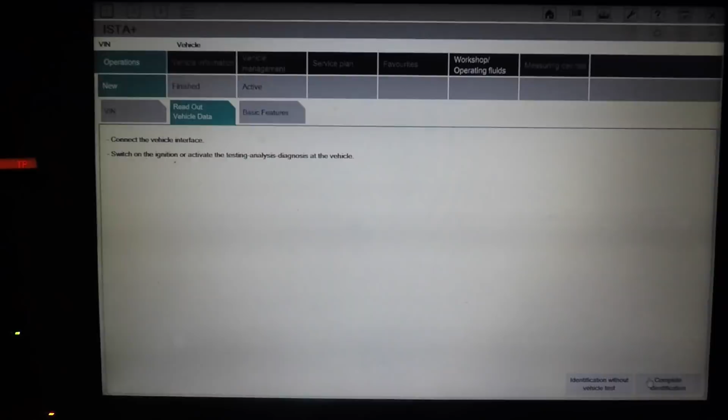So now it's loaded properly, which it will do. Anyone who's got this program, be aware of that - don't worry about it, it's not the program not working, it just can act up sometimes. As you can see, I'm not screen recording, and do I care? Not so much. Providing you guys can see it, that's the main thing.

I am trying to shoot as close as possible. Now the battery is 11.2 volts, as you can see. A lot of people always ask me why can't I see the voltage - well, you won't see the voltage if you're using a DCAN cable. You only see the voltage if you're using an icom.

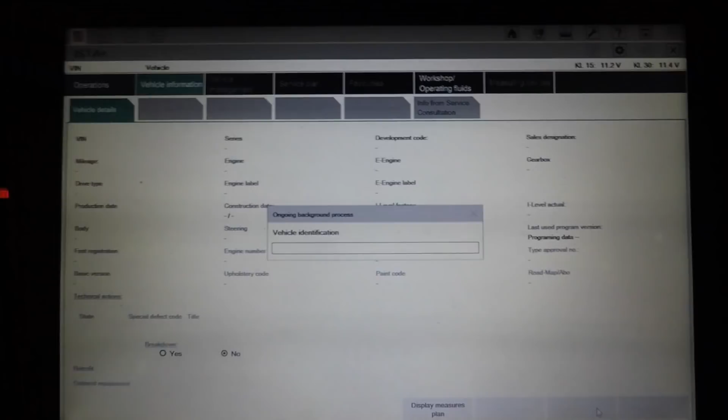Now as you can see, it's just scanning the car. On these cars, they take a long time - they don't communicate as quick as these 6 series do. These cars take a hell of a long time just to communicate with the vehicle. Don't ask me why, I haven't scanned this car since I've had it - I've been doing all the repairs.

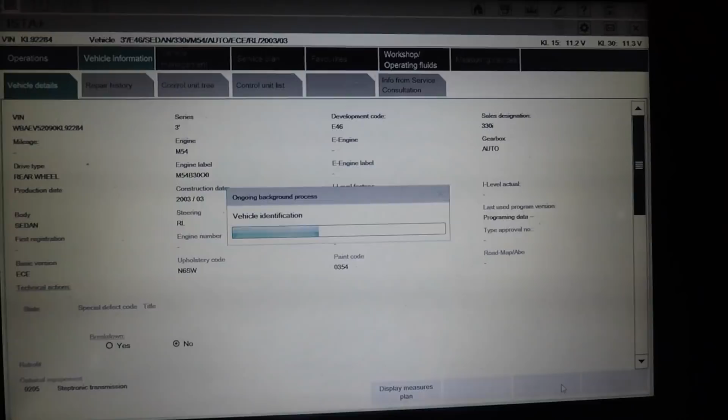We're going to now see what's going to come up. As you see, it's scanning the whole car. We're going to then now see all the fault codes. I'm going to show you all the functions on the car.

Do I worry if the battery goes flat? Not really - I've got enough jump packs, chargers, voltage stabilizers, the lot. So I ain't got one plugged up at the moment because I don't feel like I need to. If anything happens, we'll just plug one on - not the end of the world. I'm not going to plug a voltage stabilizer on now, as I've got no need.

As you can see, the DME's got a fault code. I dread to think what that is - maybe it's something because of how many things are disconnected, or maybe it's just because the car's been sitting so long.

As you guys probably will like to know as well, I haven't got the registration for this car yet - I'm still waiting for it to come. That's why I got the car cheap in the first place, because obviously it was part of a thing.

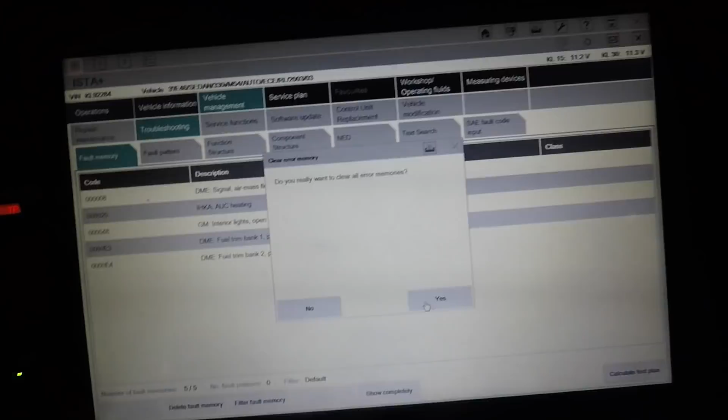And then there's the signal for the air mass flow sensor. Now I know why that was on, and that was because I didn't plug the mass airflow sensor back in when I did the PCV, so I know why that code's there anyway - that's not an issue.

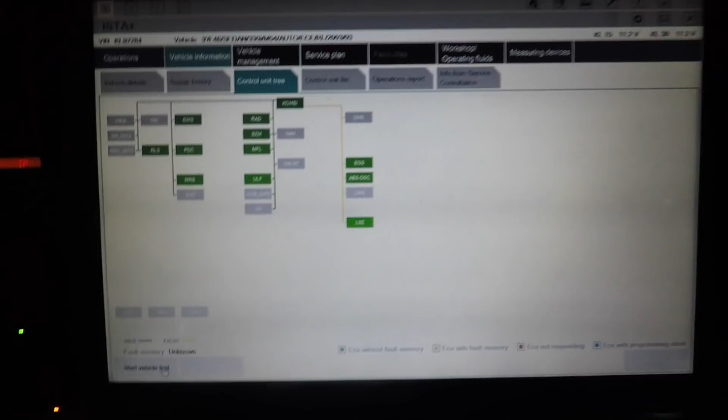Now what we're going to do is I'm going to rescan again. Now this is what you want to do - if you get any faults, the first thing you always want to do with a car is, some of the faults might have been rectified, is delete them and then rescan.

These cars are pretty easy. As you see, there's not many modules. You've got the EWS electronic drive-away protection - it's the same thing on the E60s, but a lot more complicated than what it is on the cars here on this year, because it's easier to actually make keys than it is on the E60. As you'll see here, all the modules turn up green.

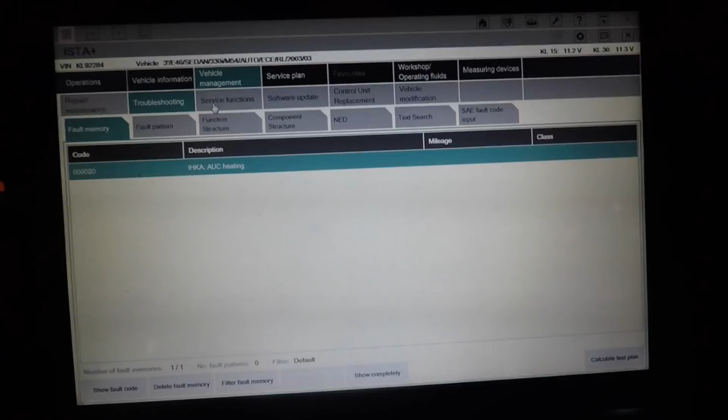Now what we're going to go into is vehicle management, and when you go into service functions, you're going to see there's not many choices - you've got powertrain, and then you've got digital motor electronics. Now when you click digital motor electronics, you've got adjustment of idle speed.

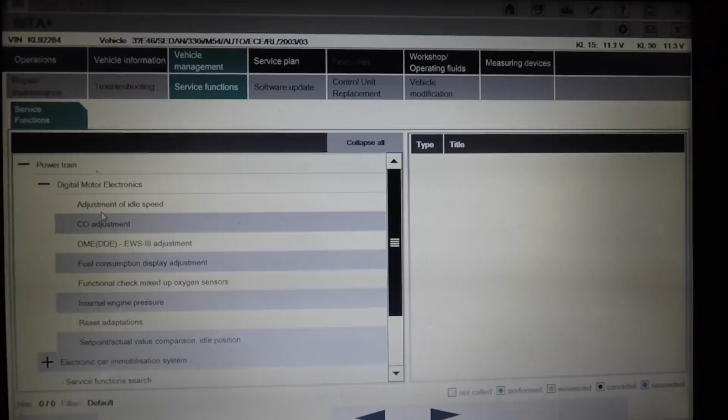Now as you guys know, on the M52 there was a rough idle problem, and you could do that to get away with getting rid of your rough idle. You don't have to do that on these - these M54s run sweet as. I don't see why anyone would want to change the idle on these - these idles are the best engines you could ever get.

CO adjustments, that's for your CO2 - if you check what kind of CO2 you're giving out, that obviously determines your road tax, especially in this country. The more CO2 you pump out, the more road tax you pay.

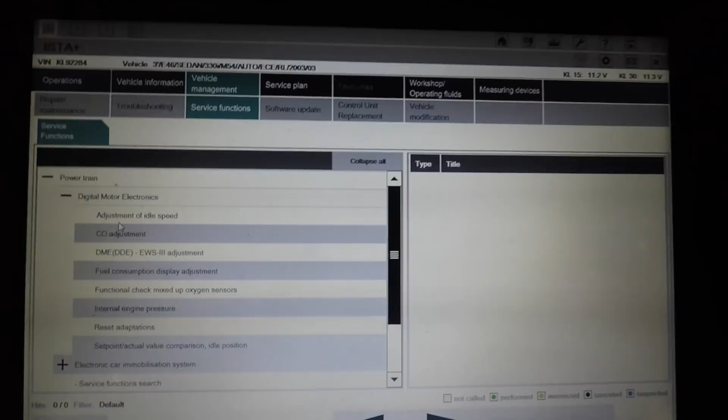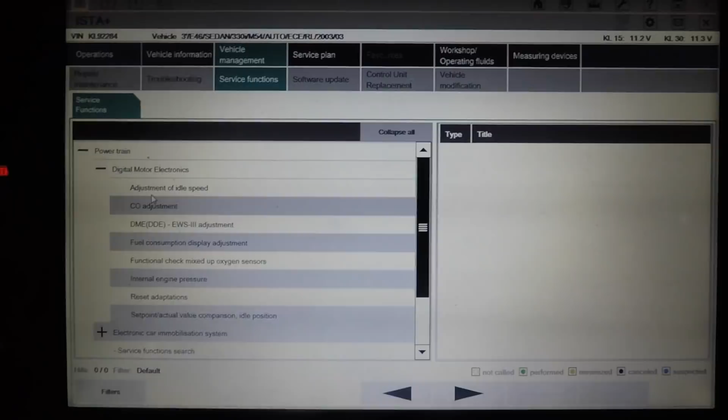It's not like it's built into the CAS, which is a complete... well, you know what I'm going to say about that. Fuel consumption display adjustment - that's if you're using a different fuel grade, which we're not. I'm using the right fuel, so this is all correct. There's no need for me to do that.

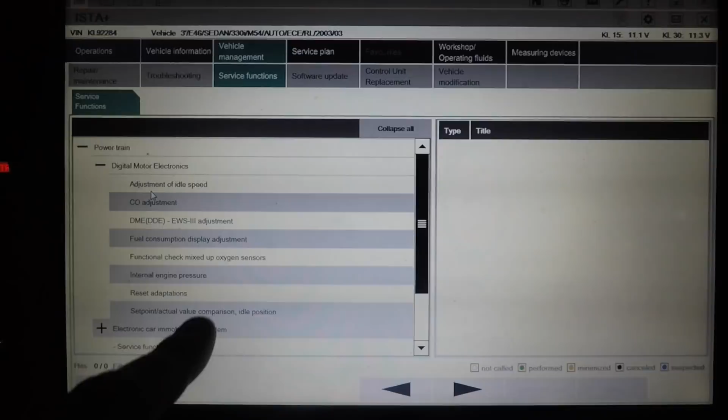Functional check, mixed up oxygen sensors. Now as you guys know, if you take off the rocker cover, you've got to take off the oxygen sensors. If you ever unplug them because you're stripping the engine, or taking a manifold off for instance, you can come here and this will tell you if you've mixed the oxygen sensors up. It will test them and tell you, and then you'll know to reset them.

Internal engine pressure - again, you need a different kind of system for that. You need a piece that connects to the laptop that runs the testing of engine internal pressure, but you can test if it's got low pressure on the cylinders and so on.

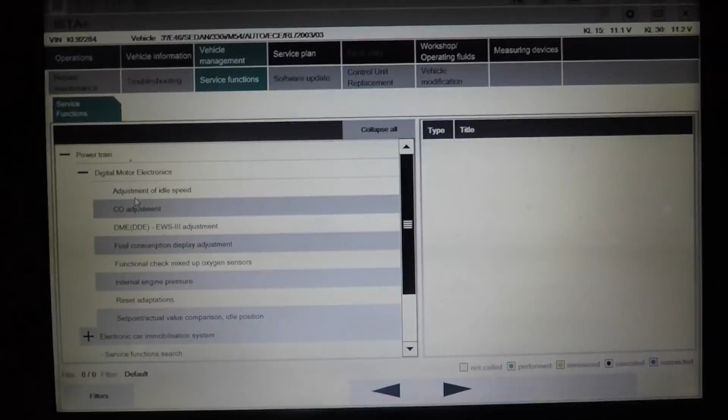Reset adaptions, as you guys know, resets the learning adaptions for the gearbox and the engine on these cars. Very good function, I use that a lot - that one especially when I get a new car. That's the first thing I did when I purchased this car from the owner.

Straight away he was asking me what I was doing. I told him I was resetting the adaptions, because that brings up any known fault code someone's tried to hide. So when you reset the adaptions, set point value comparison idle position.

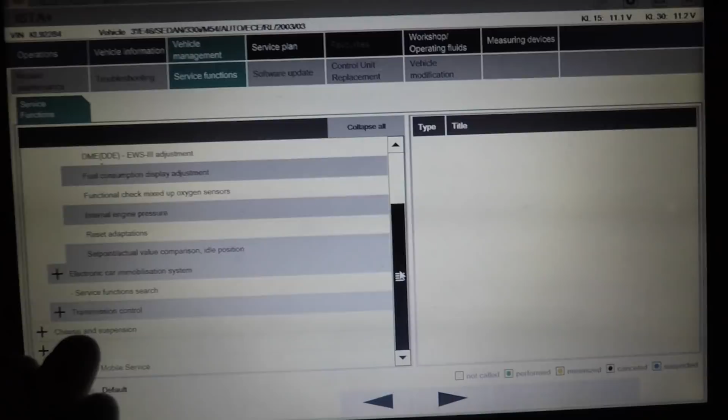That will tell you the actual position of the idle and the set point. So if the set point is set at 650 RPM and the actual value comparison ends up sitting too high, one of them's out of sync, so you can find out if it's the computer that's running the idle at a point - so you know it's the sensor - or if it's the idle control valve itself not functioning fully.

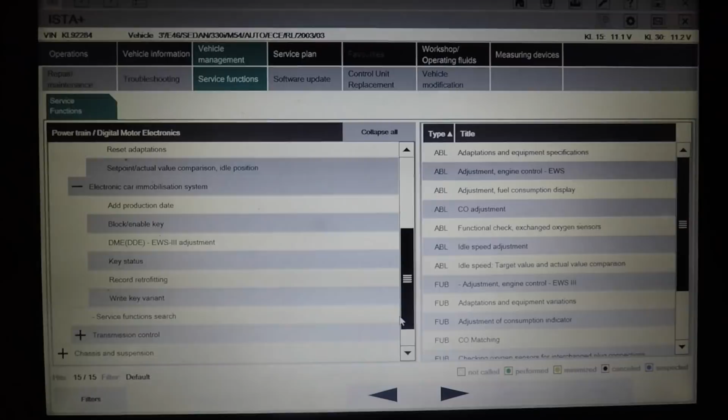The electronic car immobilization system. Now in here you've got add a production date, so you can add the production date of the key. You can block and enable a key.

Same thing on the E60s - if you lose one of your keys and you've got keys registered in the EWS, you can block them if you lost them. I have both, I don't need to do that.

Again, you need to do the DME EWS adjustment for that key, so the key registers with the car to unlock it and it deactivates the immobilizer.

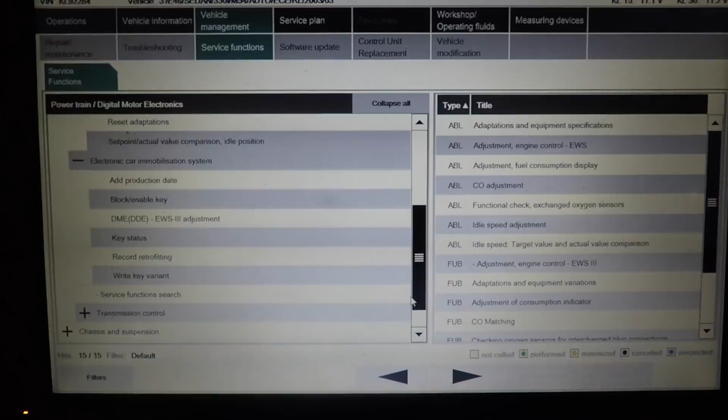The key status, so that will show you the battery and if the key's picking up a signal between the central locking, which mine are.

Record retrofitting - so retrofitting will be if you've retrofitted the EWS or retrofitted a new key, and you can write the key variant as well. It's all to do with really the keys on these cars, because they're not hard to do.

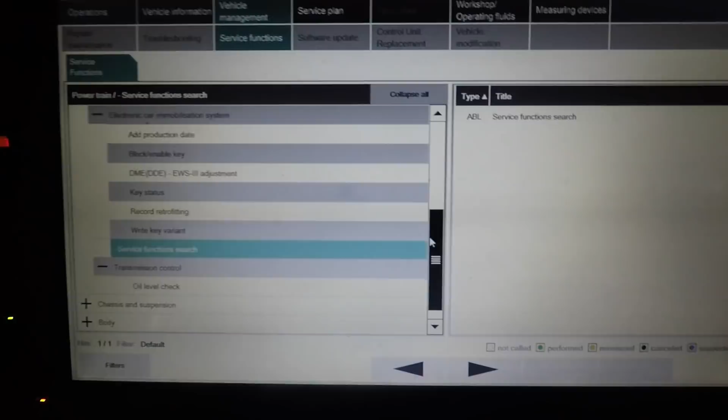And then you've got the service function search, which is all the service that's ever been done. Oil level check - again, that's only the one in transmission, because it doesn't come into adaptions here on the transmission on the E46. But the oil level check is the oil in the transmission, so you've got to let the car get up to temperature and you can check the oil.

That should be used when you change your gearbox fluid on any of these cars. Use that and it will tell you the correct temperature of the oil. A lot of people don't do that, but if you use it, your gearbox will be fine when changing the oil. Chassis and suspension.

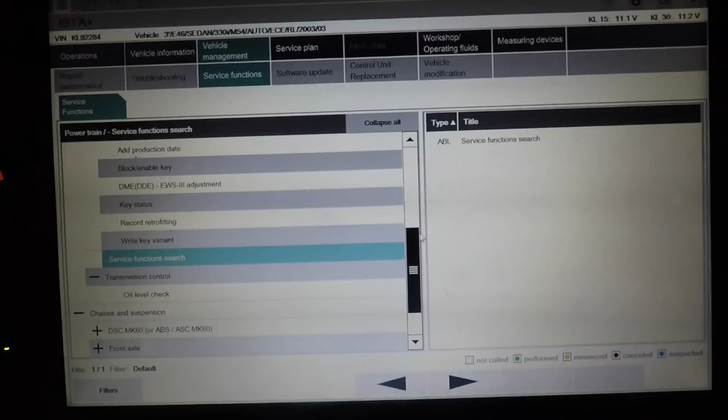Now as you guys can see here, we've got the DSC MK60 ABS module. You guys know what that is already - that's a common problem on the E39s, they go out. Now what you can do with this is check the ABS module.

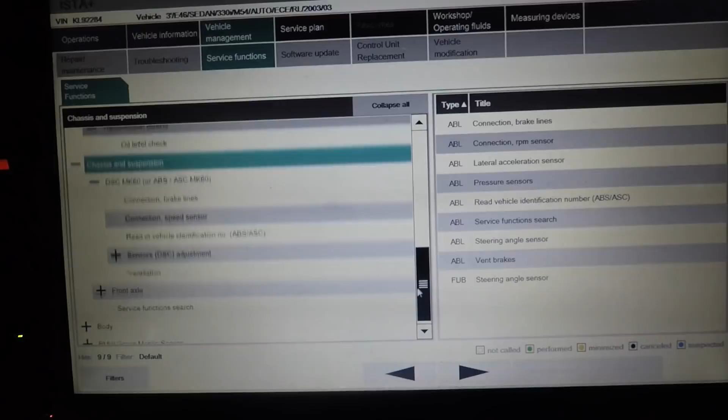So if I click that down, you can check the connections to the brake lines, the speed sensors, and you can also check the read-in vehicle identification number. As you guys know, when you change these modules, you have to change the identification number on them modules as well, because if you don't, they won't pair up.

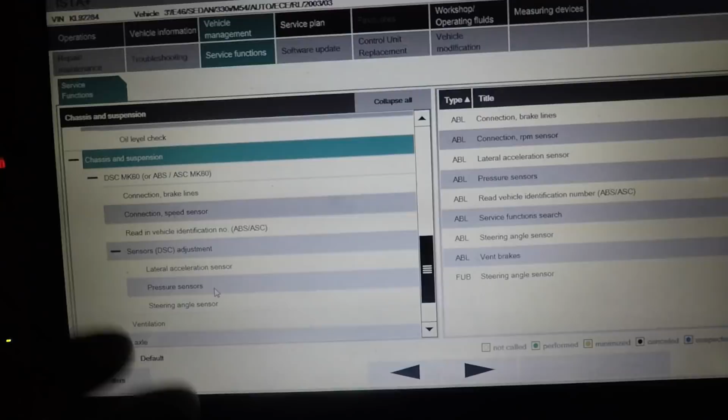Sensors, DSC adjustment - so the lateral acceleration sensor, which is your throttle valve, as you know that's got to be adjusted, as it knows it's got a sensor on the pedal itself. So you really do need to recalibrate that all the time when you fit a new throttle position sensor. Pressure sensors for the DSC - these have just been replaced, two of them, so they have been done.

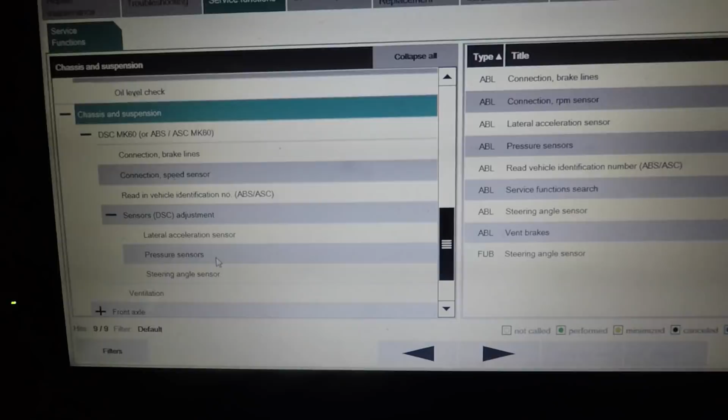Steering angle sensor, you guys know what that is very well. Nathan's done a video about that. It's not really common on these. In the US, I see it a lot, but in this country, I've not seen it on any cars I've had, so I'm not going to go into that.

Ventilation is for the ventilation of the brake, so that's to bleed the brake system on these. You will see bleeding brake routine on the E60. On the E46, it's called ventilation to vent the brakes. It's a whole different setup. This is what I was telling you.

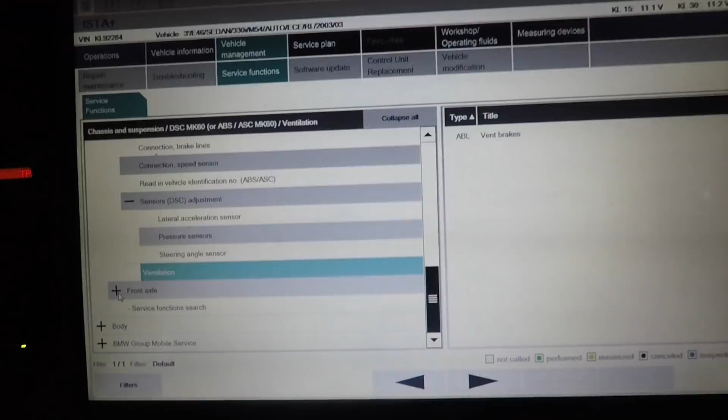Now you can check the wheel control joints on the front axle, and that just tells you how to do that. The service functions, again, is the search, you don't need that. Now in the body, as you'll see here, there's not many modules here as there is in the thing, air conditioning.

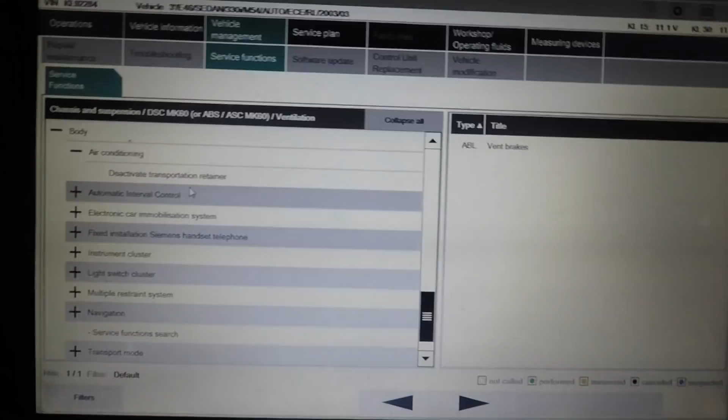You can deactivate the transport retainer. As you guys know, when these cars come brand new, they set a transport mode on them. Why do they do that? They set transport mode so the AC compressor doesn't wear out in transport and getting bounced around all over the place while it's on a low loader coming over to the country. So you can deactivate that. Most dealers do that straight away as soon as they get it anyway, take it all off transport. So if it's got air suspension, you've got transport mode on.

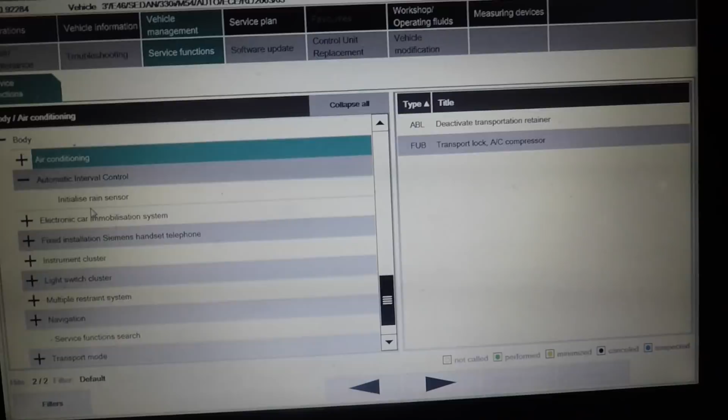Automatic interval control, initialize the rain sensor - you guys know what the rain sensor is, it's above your mirror in that little black casing. Sometimes it goes bad, sometimes it doesn't turn on when you want the auto wipers to. On the E46, E39 and E53, they turn on automatically. On the E60s, you have to turn that on. Again, that all varies. If you've got a problem, you just come into there and reinitialize it.

Electronic car immobilization system. As you guys know, we've already been through that. We've just went through that. It's all the same thing, it's no different.

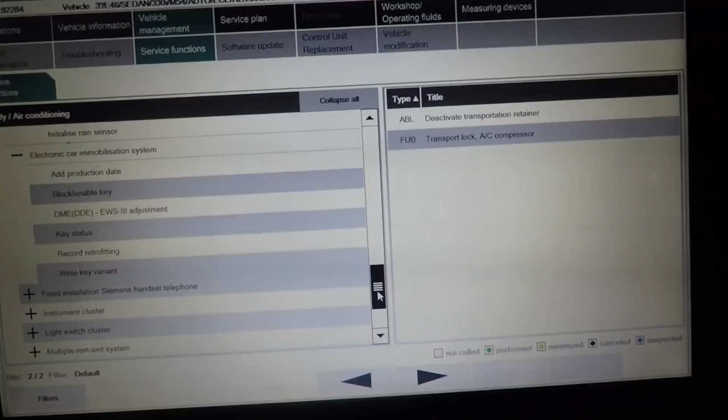Instrument cluster, so you can reset the service interval indicator with a diagnostics tester or without a diagnostics tester. It just depends. Or you can do a system test on the cluster itself, so if the cluster's at fault.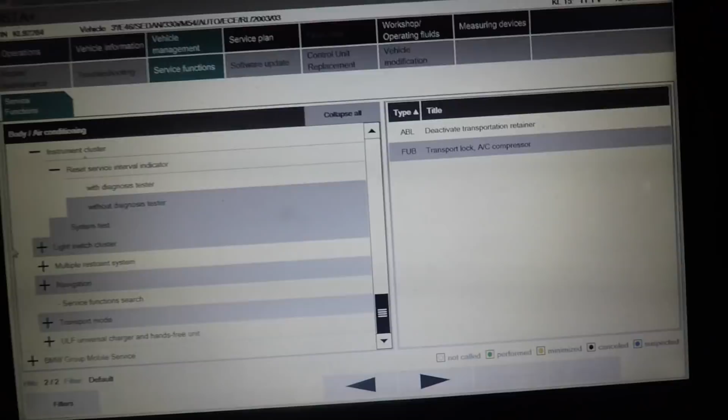Next one is light switch cluster. You can read out the operating data from the light switch data, so if anyone's tried to do mileage manipulation, for instance, you can test it.

Multiple restraint system, you can read the coding data to make sure the coding's correct for the airbags to deploy. It's all things like that, especially because if you change an airbag module, you need to make sure it's coded in.

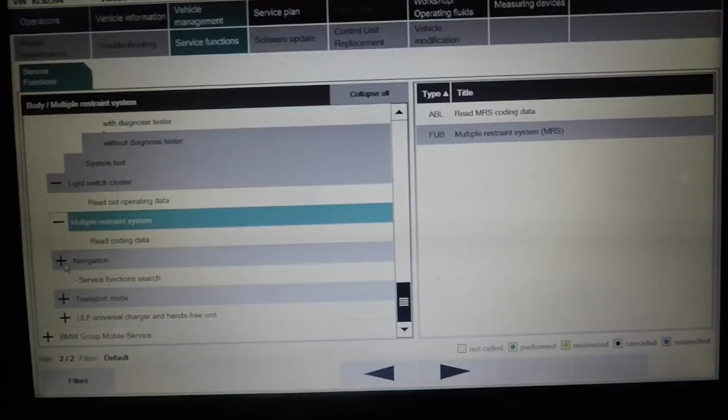Navigation, DVD lock - we don't have navigation in this car. So, transport mode as well, as you can see there's the delete transport mode. It deletes everything in transport mode.

ULF, universal charger and hands-free unit - that's just change emergency call number, nothing major. BMW Group mobile service, this is all if you've got cover on your car from new.

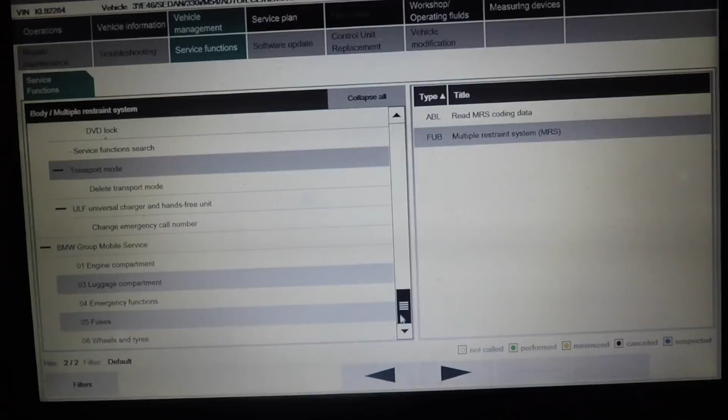As you can see, there is a lot there, and as I say, troubleshooting, you can go into this and you'll get your fault codes, and as you see, IHK or AUC, that sensor always goes bad. Same as on my E60, you guys know I've got that fault code as well. Them sensors, there's no point even replacing them, especially on the E46. On the E60 it controls the aircon, on the E46 it does not. That's just that little box that sits in a bloody fan, it gives you a headache.

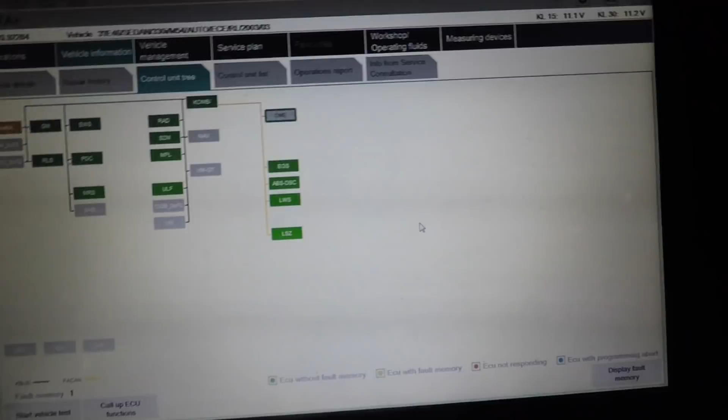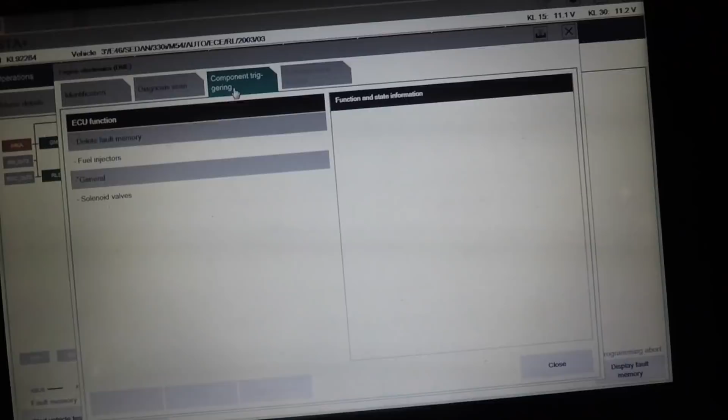Now, as you're going to see here, I'm going to call up the ECU functions. I can call up different ECU functions on the ECU itself, so I can show you guys what you can do with each ECU individually. If I call up the ECU functions of the DME, for instance, it will give me all the functions I can test on the DME.

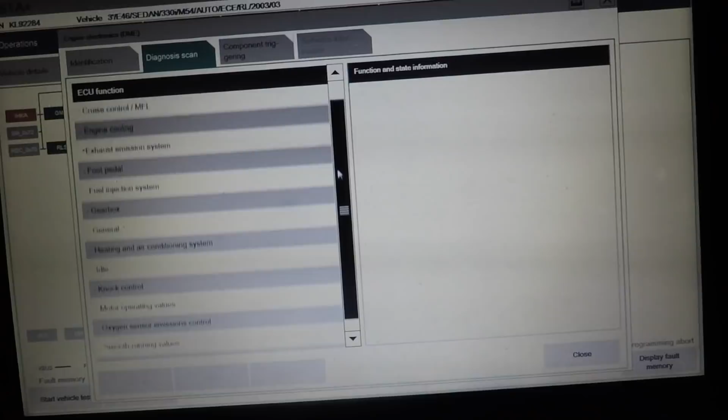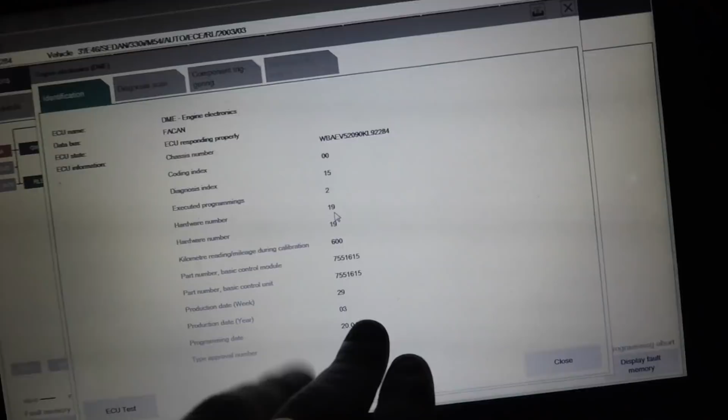Diagnosis scan, everything in here. As you'll see here, the gearbox, the knock control sensors, the smooth running values, the exhaust emission system. So for instance, if I go into gearbox, I can select the lever settings or transmission intervention, which means it will try and test the transmission and make sure everything's working fully.

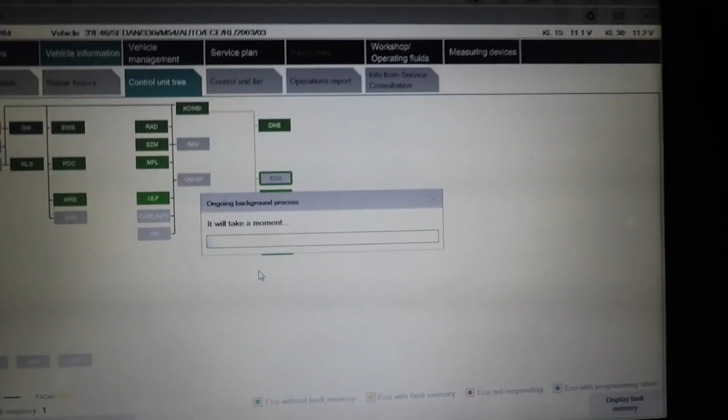Do I need to do that? Not really, no. But again, it also shows you identification if you're on the latest firmware - production date, the year, programming date, as you'll see, 20th of the 4th 19, because that's when I updated the modules. So I updated all the modules and everything went fine. That's the latest on the latest firmware, so that one's out of the picture.

Now let's move on to EGS. So if I call up the EGS, let's see what the EGS recommends.

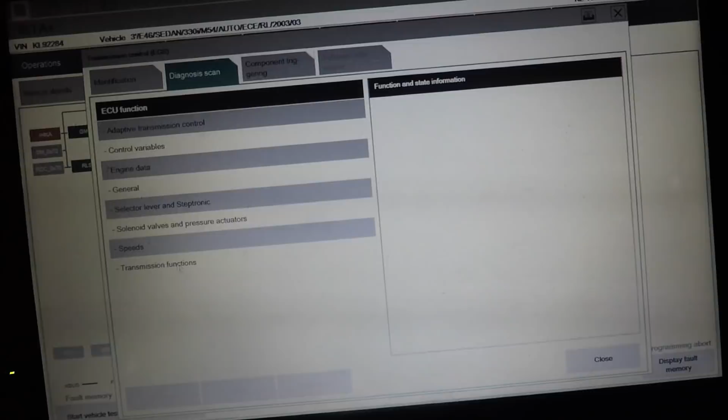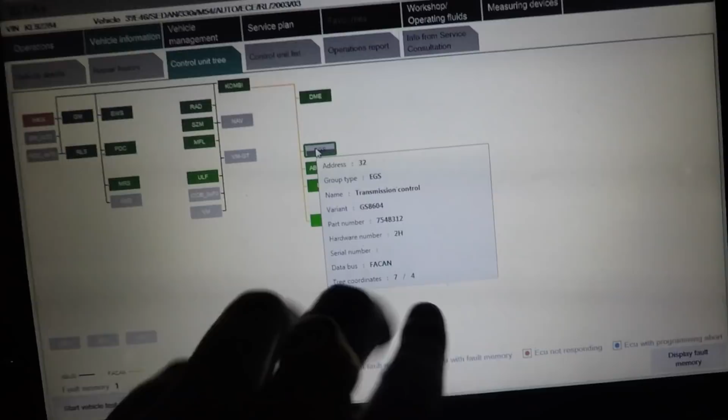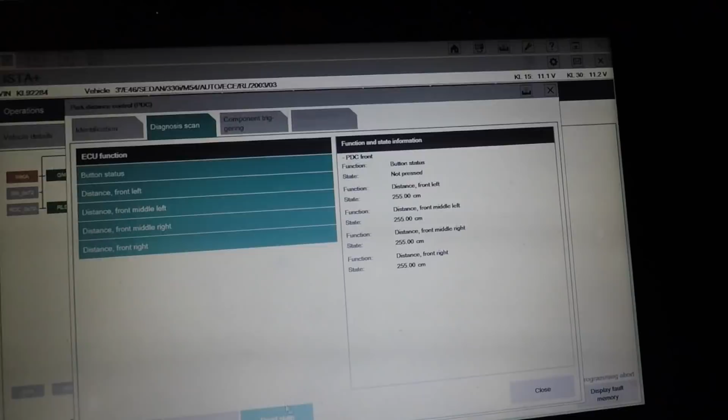Or again, you can test the pressure actuator in it, the solenoid valves. You can check the reversing light, only available with the E46, for instance. And then again, you can come into diagnosis scan and just test everything, the transmission functions, everything, the speed, switch programming. And again, if we go to identification, we should see that I updated this as well, which you do see right there. These have all been updated to the latest firmware, which they weren't on. Why? Only God only knows. But they are all on the latest firmware now.

As you'll see, if you just hover over it as well, it shows you what the make is and everything. I did show you this before. You can see there, when you hover over anything, even a DME, it shows you right there what it is, MS43, and it will show you the part number as well. Now, the same for the light switch cluster, which is, like I say, not really anything important - the ULF, the universal charger, and hands-free.

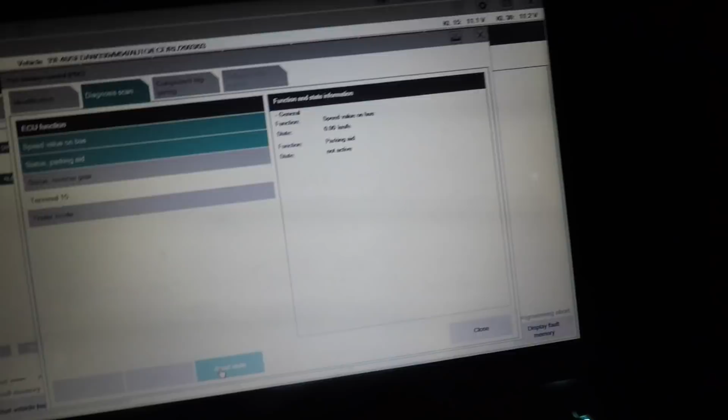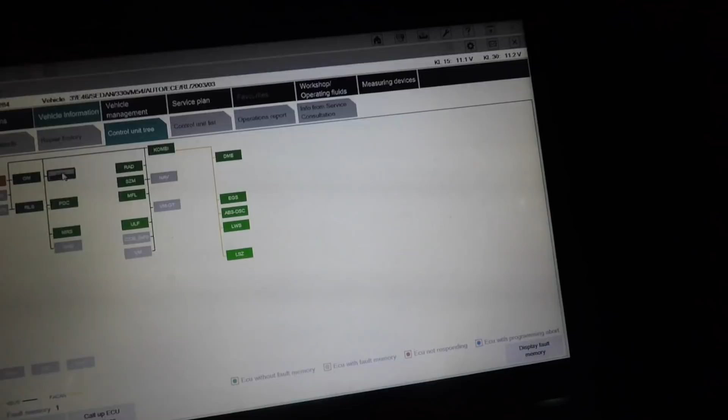So if we call up the functions, again, I can just do diagnosis scan. I can click general, Bluetooth code, and as you'll see here, I can get the code from the Bluetooth module, 4846. As you see right there, that's how you get your Bluetooth code without looking for your Bluetooth module. Now, I know I did a video showing you guys how to find your Bluetooth module in your car, but this is how you'd get your Bluetooth module code right there, and that is your Bluetooth code. That's the easiest way of doing it. If you get in a car and you don't know the code, that's all you do is come into it and it'll tell you it.

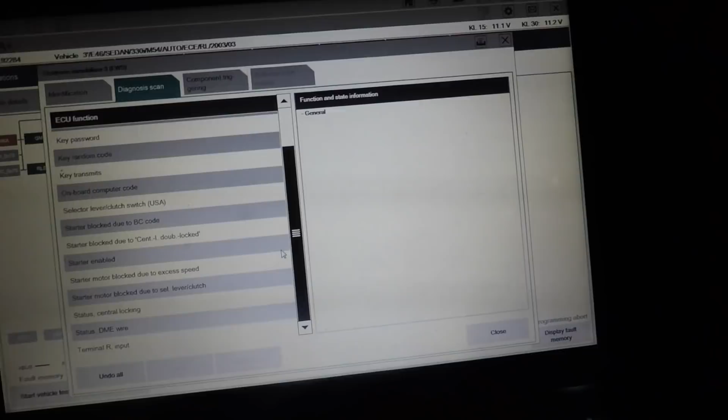I did this because my family's all in BMW and they didn't know the code for their Bluetooth module, and that's how you find it out. BMW, we're not stupid. You can easily reset the control unit if you wanted to, but I don't need to, and that'll delete any old mobile phones registered to it.

The PDC, for instance, I fixed them as well, guys. I didn't do a video on that, but I've done it. It wasn't a hard job. Do I need to update it? No, I don't. PDC front.

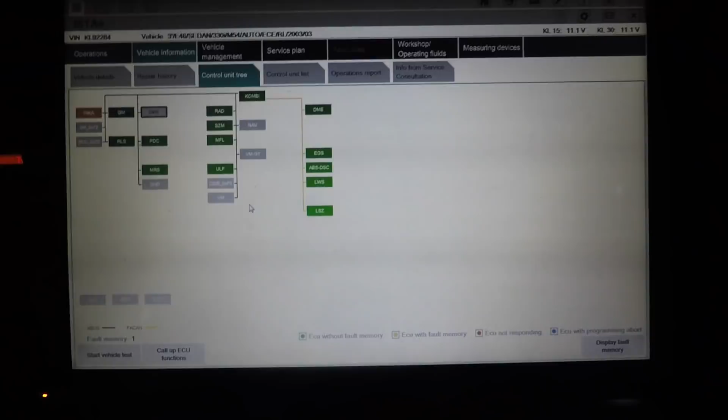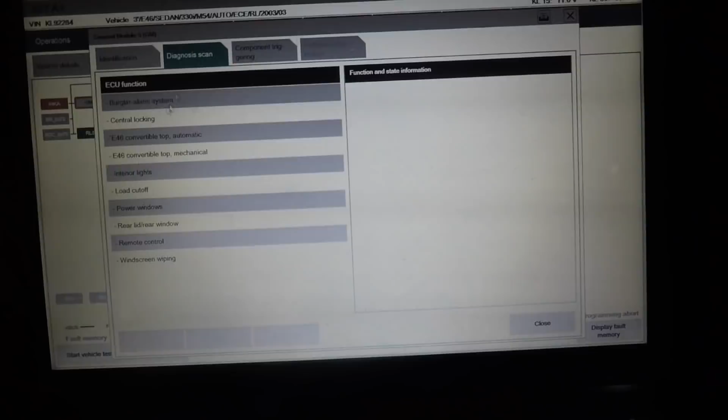So for instance, I can just show you now. Distance front left. We're going to test them all: front, middle, front right, and front right again, which we don't have. Status was not pressed, so I don't know where the button is on this car. I don't know if this is the one right here. No, it can't be the button. Like I say, I don't know where the button is on these E46s. I don't think they do come with a button. But we don't have front parking sensors, so I don't know why this is even coming up anyway.

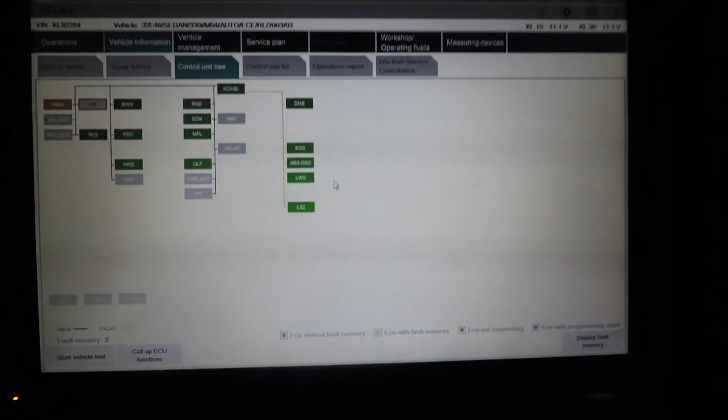We want the PDC rear now. If we click them all, you should hear them all activate. I don't know if you'll hear them or see them. As you'll see, that shows they're all fully working. 255 centimeters. They're all fully working, the parking sensors, as you can see. And that's what you want to check if you ever get worried that your parking sensors ain't working.

So you can check the status of the parking aid, for instance. So it's not active, I don't know why that is. Reverse gear, that's because reverse gear ain't active. I only have reverse ones on this, I don't have the front ones on this car. But you don't really need them on this car.

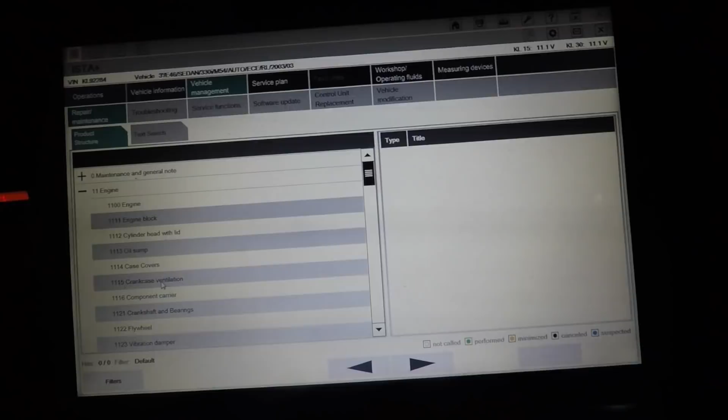So we can check the acoustic generator. Let's see, and as you can hear there, that's the reversing sensors. That's the acoustic generator, the beep you get when you're backing up too much. Good thing BMW put it in the front here.

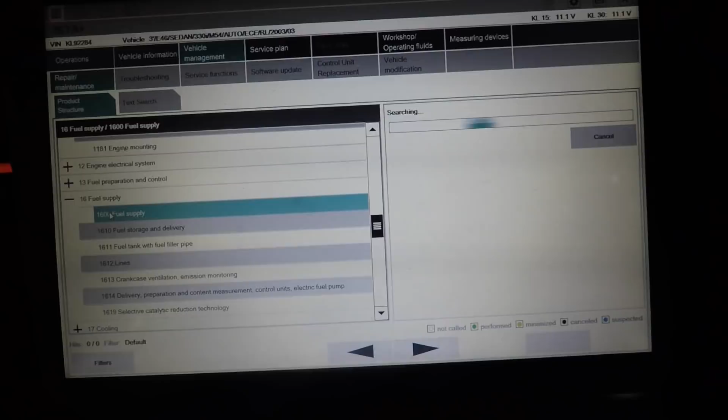EWS, now this is another one. I don't really want to update this because you don't have to. Again, you could check here, go into diagnostic scan, and just go into general. You can check the current key number, key identification, make sure the key's transmitting the signal, starter enabled, random keys, random code, and check everything.

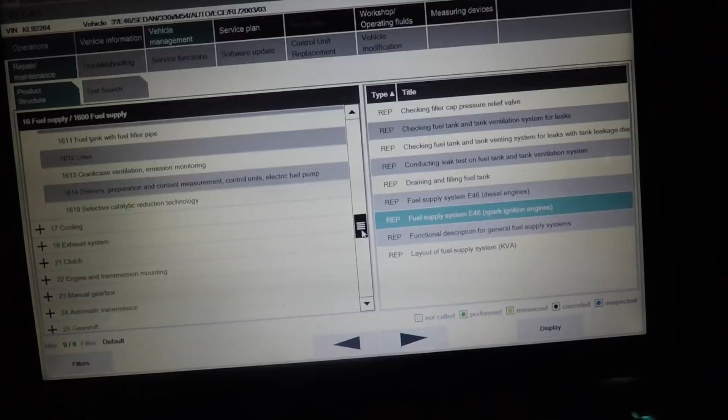Now obviously I'm not going to put that up for obvious reasons, my random code, because you don't want the random code coming. That's the random code that changes all the time, a rolling code as we call it, that changes with the EWS and immobilizer for the key. Every time it generates a new code to start your car. That's why you can't just go and buy a key and think it's going to work. It don't work like that. They have to go through the EWS and you have to get the rolling codes out of there and match it with the DME, and then they change their codes in cycle.

Now in the GM one, the GM is the one most of you always have a problem with in the US. So this would be all the modules right here, to test all the windscreen wiping, the power windows, or just everything you want to test on the car. E46 top automatic, and you can test the central locking and just test everything's working fine.

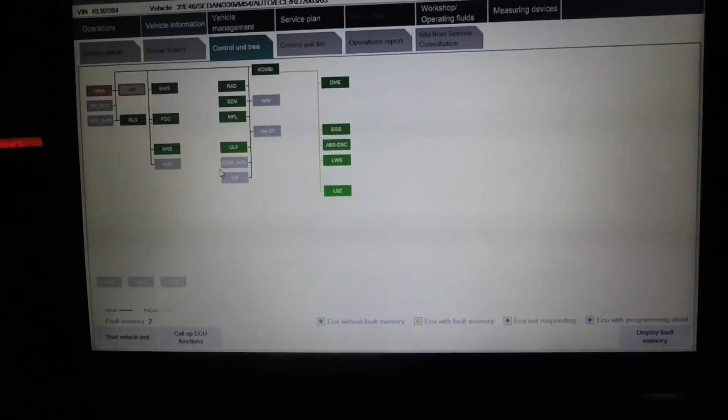Now as you'll see here, there is quite a lot of modules here that you can test. And this is why I say to people, this program will help you so much if you own a BMW, because there is no other program on the market, even to date, no cheap scanner, nothing, that's going to give you this much information regarding your car and help you through every problem and let you test every function on the car.

There's nothing, this can pick up every module in the car and test every module. There's not one function this thing can't do. It will show you how to repair it, it walks you through it as I showed you here.

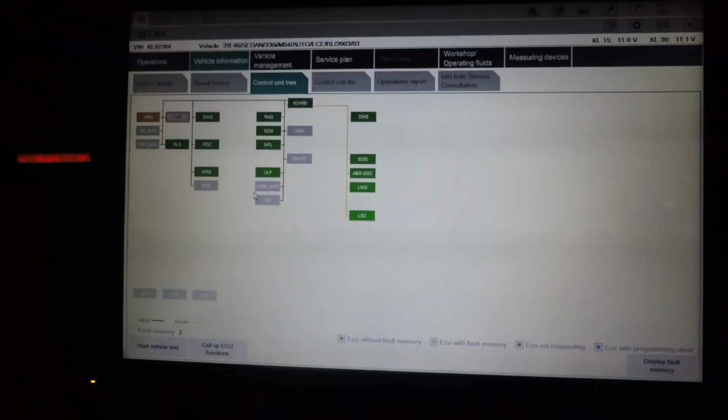You can just go to vehicle management and you can check, like for instance, crankcase ventilation. I'm just going to show you guys, for instance. Should be here in a minute, hold on a second, let's just find it. So like I say, if you just click on anything here, or even for instance let's just try here, the fuel supply. If we click on fuel supply, see what comes up.

Fuel supply system - if you click here, it will show you everything to look for, like the rollover valve, pressure limiting valve, and many other things. It will show you everything it should be at and how to do it. This is all the repair maintenance stuff, guys.

No other program will give you all this and help you through your problems with your car as much as this will. You'll be surprised how much data this little program holds on its own, especially on BMWs, on the E46 and these kinds of cars. I know they're easy and straightforward, but bear in mind they can still get very complicated because they're old, and a lot of people don't understand, especially if one of the GM modules go down.

And it's good for coding as well. Like if you want to code in simple basic features, like your locks to go down, or in the US the daytime running lights, you can code them out. Or if you want to code out the automatic locks when you drive off, because that thing's really annoying, you can do that too. There's so many features you can do, like turning on your mirror to drop.